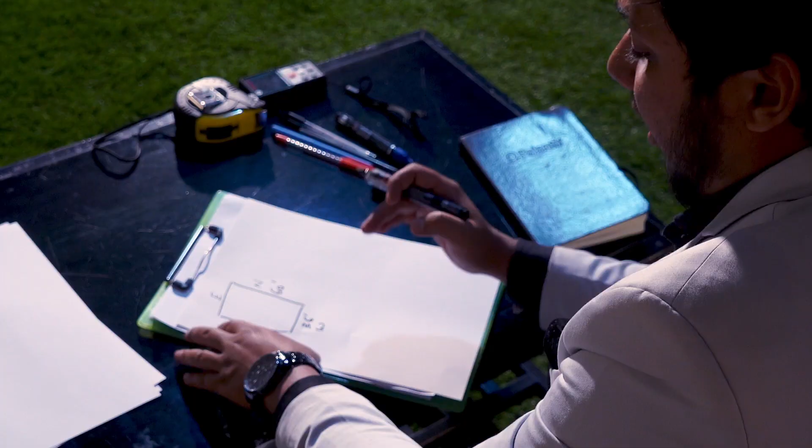So the first thing to ever be plotted about this villa on paper was a green yard. This green yard was plotted in such a way that all the openings of all the units open up into this area. It hosts a very beautiful garden, a creepered wall and a water body. Then we even had the back setback area, the side setback area and the front setback area.

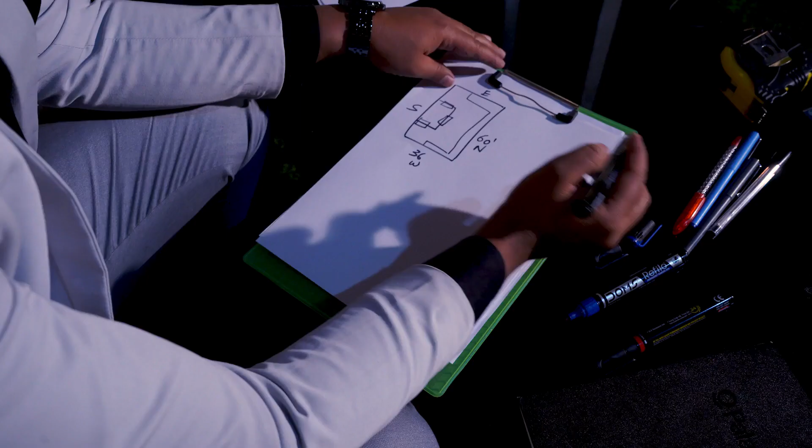So coming to the ground floor, the whole area was divided into 3 coordinates, which was again divided into 9 coordinates.

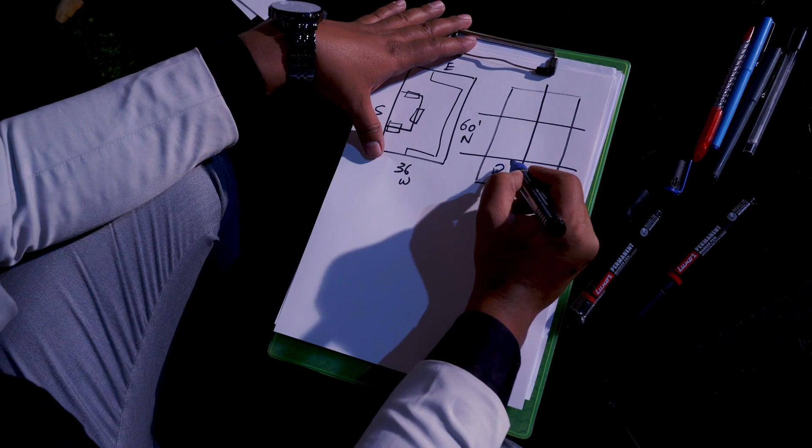So what we have here is the parking area, and here's the entrance. Once you enter we have a foyer wall here, and at the entrance a very huge main door which is around 6 feet wide and 8 feet tall.

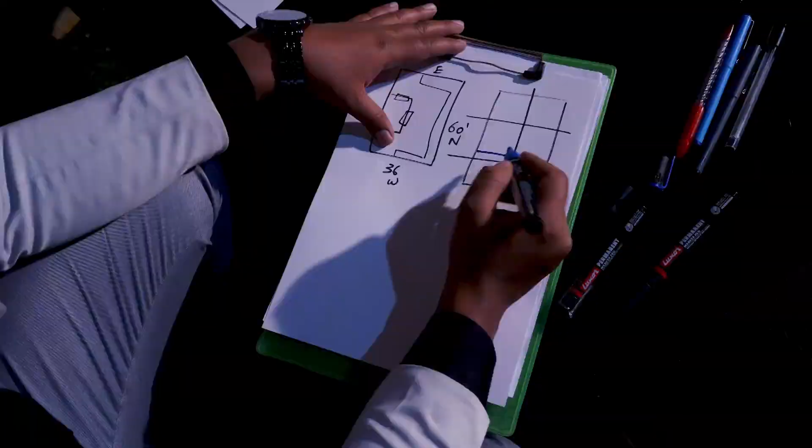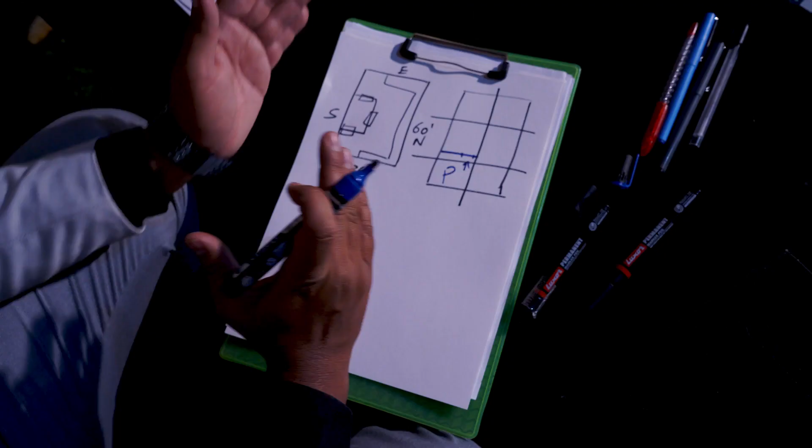And what we did was create a similar niche in the opposite wall, and what it does is create a sense of privacy and restrict the house from unfolding itself as soon as you open the main door.

This is the living area.

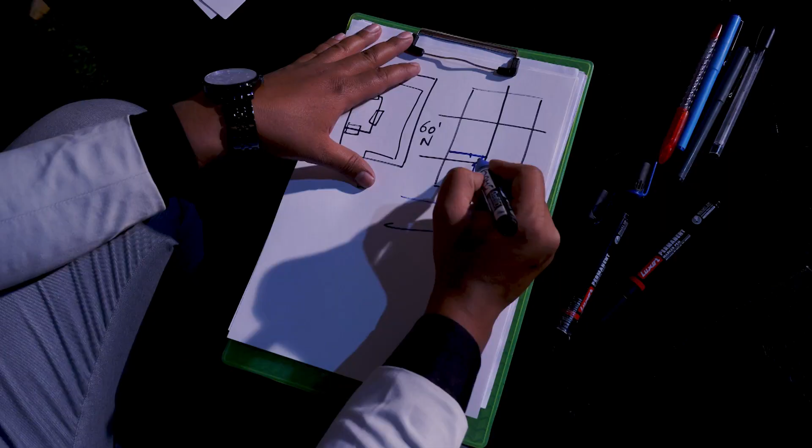And on to your right we have the staircase area. This is again divided into 2 parts: this is the dining part, which is overlooking the green yard we discussed, and this is the kitchen part, which hosts a storeroom and a utility.

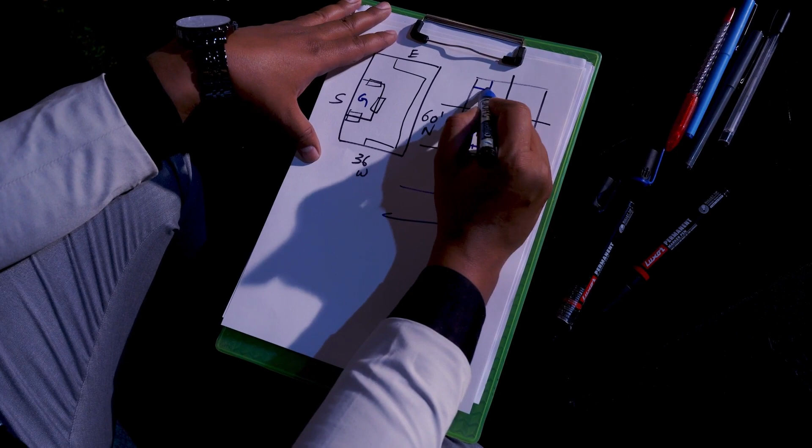And from the dining you have entrance into a ground floor room, which is the grandparents' room. This is the bathroom, and this is a general bathroom for outside guests.

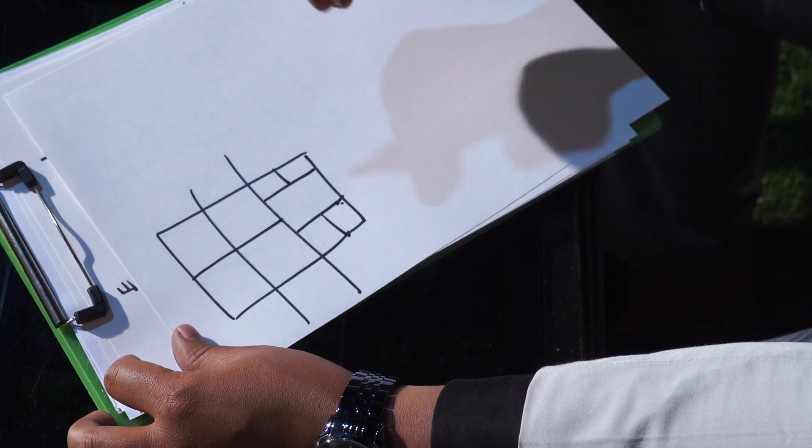So then you go up into the first floor, and in the first floor it is again divided into 4 coordinates, which open up into 4 more coordinates. This is the staircase you just climbed, and this is the living area.

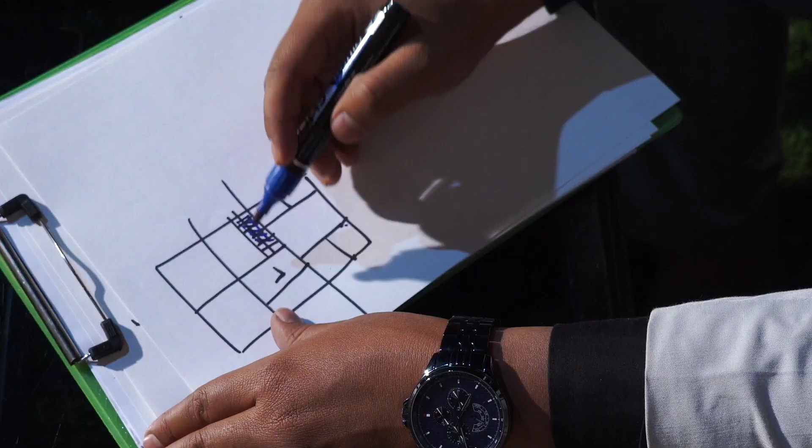So from the living hall we have entrance to 3 bedrooms on either side. Once you enter from this living room, we have the master bedroom here, which is divided into 2 balconies on either side, facing the 2 huge trees in front.

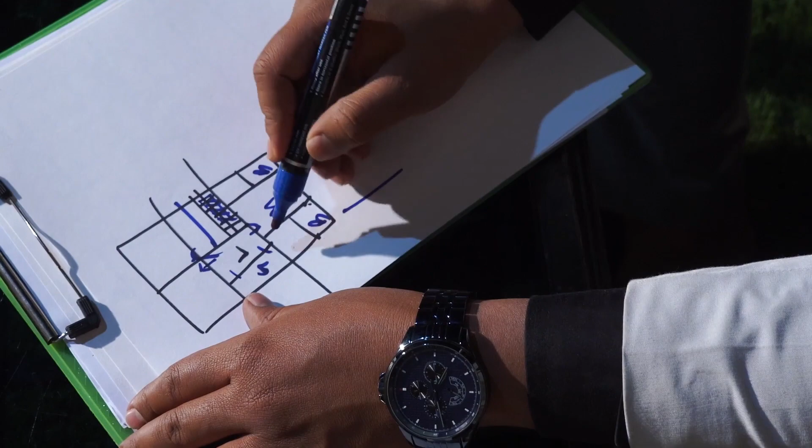From the master bedroom we have a study, which opens up into the green yard area, and this is the dresser area of the master bedroom.

And the second bedroom, which is the kids' bedroom, is opening to the north end, and this is another kids' bedroom which has the dresser and the bathroom together.

So again, when you climb the stairs from the first floor to the second floor, we have these cutouts made, which is divided into 5 coordinates, and this is your staircase, which hosts a bridge overlooking the living hall on the first floor and even the green yard on the ground floor.

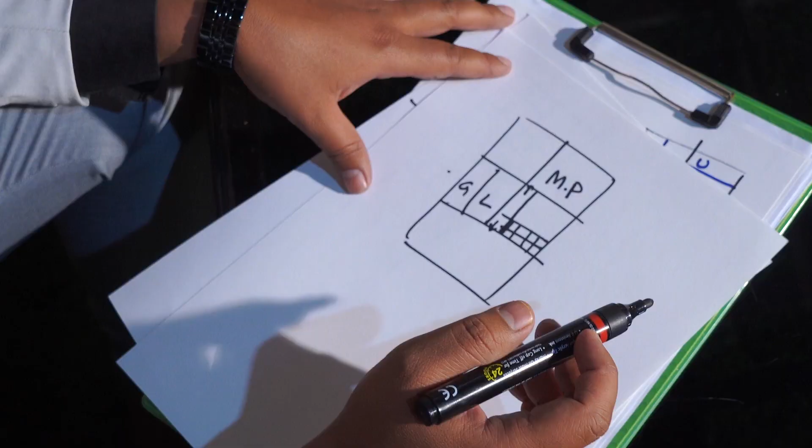From this bridge we have 2 openings on either side. One opens up into a multi-purpose room. The client's family had spent a lot of time in the Middle Eastern countries and wanted to adopt that tradition, so we converted this multi-purpose room into a majlis, an Arabic majlis.

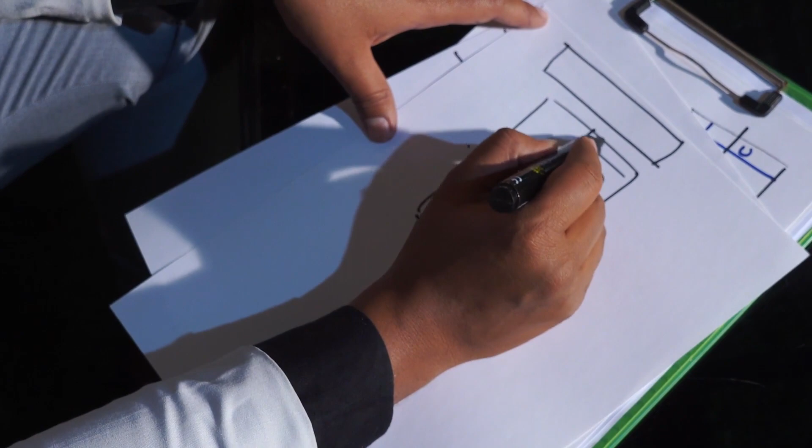In the layout of the area, we had a park coming behind the building, so we went for a glass facade on either side of the multi-purpose room, so as to look into the garden, which hosts a very wide range of view from the room.

So we have glass facade even on the other side, which opens up into the terrace garden. The terrace garden hosts 2 beautiful stone benches where I am sitting right now.

And then we have a spiral staircase here, going up to an area which hosts some overhead tanks and the solar assembly. Once you come to the other side of the passageway, you open up into an open terrace.

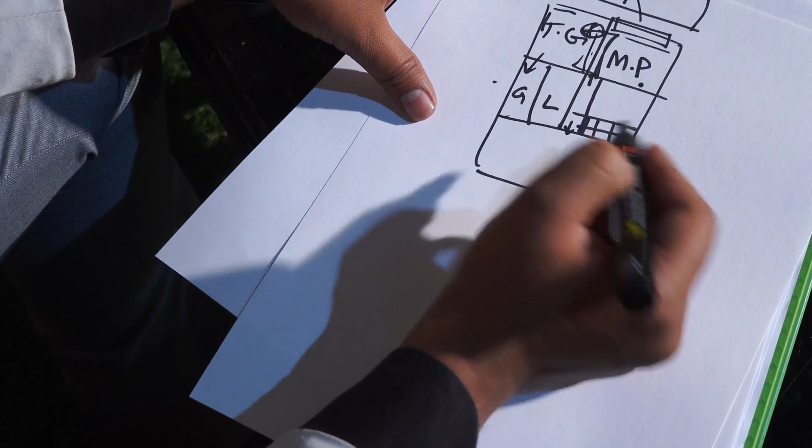This open terrace hosts a set of pergolas going all around. We can have a provision for an iron dining table here, and we have a barbecue counter here at this end.

The design, the build quality, the detailing and the finish came out pretty neat, and the clients were pretty impressed. The aerial shots of this entire villa exposed a lot of greener parts of the house, hence the name 'The Nest'.

Constructing a house is an art, and we at Massive Constructions firmly believe that instead of going out for enjoyment, you can make your house enjoyable by constructing different levels of different themes and giving it a slight new face.